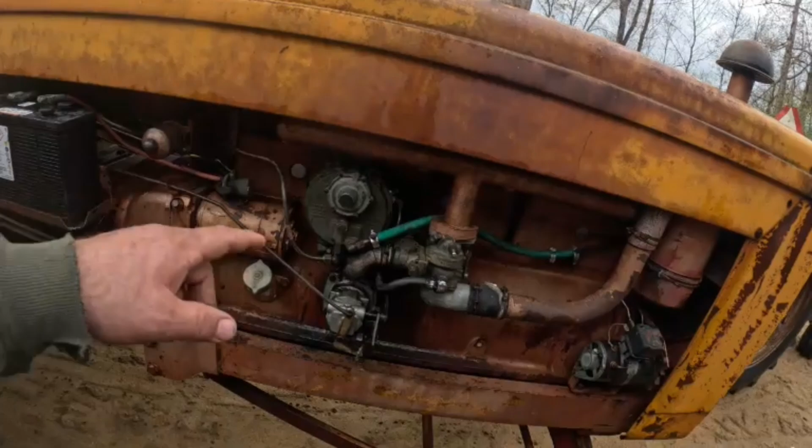And I want to change the starter solenoid. I'm still searching for that hose. If anybody's got a lead on a hose, I've called Welters, I've called Dean Zingray, I've called Philip there, Rusty Fence Row - he doesn't have one. He suggested make it out of copper, so that's one of the options. I called Clint Stom, I called a couple of my friends, I called Mike Tessman, he's looking too, I called Jay Grosskreutz, I called Mike Ehlers in Minnesota. I'm getting there. So if you know of one, don't just say, hey, check with these guys. I want to know they have one.

So I'd be interested in a good used one, just as long as it was good, of course. So this is the original wiring harness here, which, well, the coating's cracked there. I'm sure this is for the lights, but I don't know. We'll look at that too. It's not that I'm gonna be driving this tractor at night or anything, but I don't know what else.

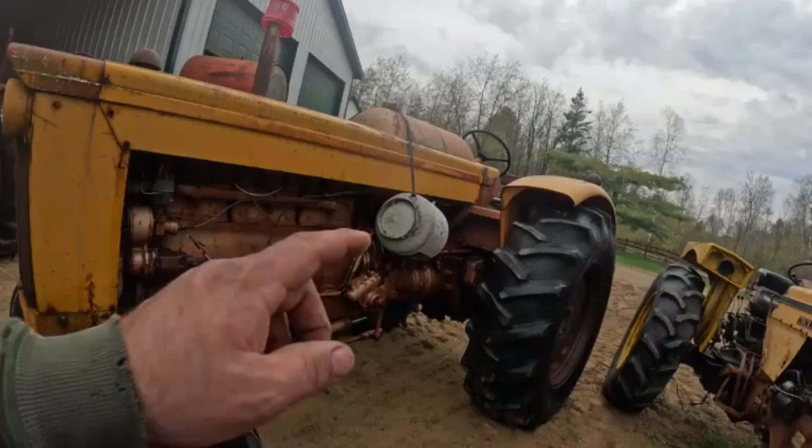Oh, the brake, I gotta figure out what's going on there. I don't know if you've watched the video or heard me say, before I went and picked this tractor up, this brake, or this wheel, was froze, which the brake was stuck. So the guy's son I got it from took the 4 bolts out of there, of the brake, to let it release. Well, then he couldn't get the holes lined up. So not awful, nothing hard to tackle, but missing a few bolts in the sheet metal.

That's not too much. We got to figure out my muffler situation, either order one or at least put a rain cap on it. I guess I need a filter. So I took out this housing here, and there's no filter in there. It's just like a paper filter. The original ones were more like cotton or something similar to that.

Yeah, you could have a belt pulley on these. You've seen even the 705s had that area for the belt pulley.

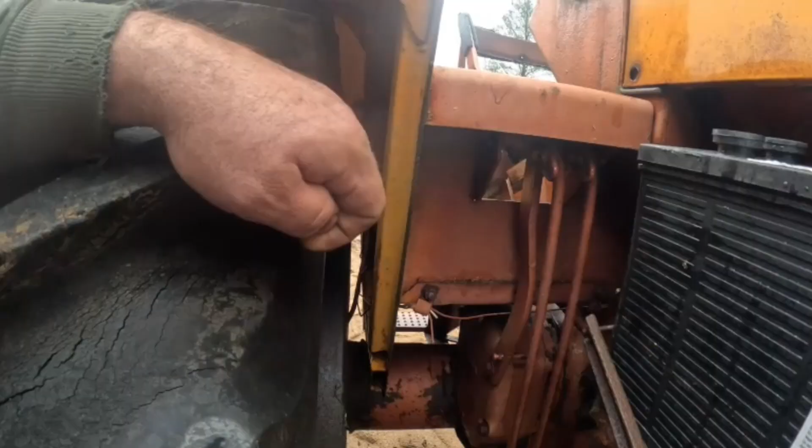Let's see, because that's the lever. I think the brake spring's missing too, because that should be - I'm thinking out loud, I guess. I was thinking those pedals had a brake spring on. They hook here, oh, they hook here and hook here. That's right. So I might have to order those too, just so that they spring back.

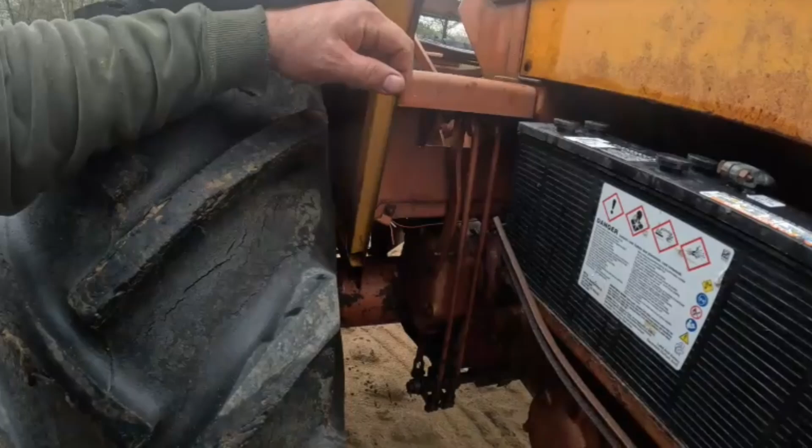That's right. Okay, boy, she's not awful dirty. Did have somebody comment about tractors lasting a lot longer when they're stored inside. Yeah, I agree, but I just don't have that option here. I could probably sell half my tractors and still not be able to build a building the very size needed.

So I do rotate them around, get some undercover for a while. I like in the wintertime to have all the diesels put away, as much as I can. But I've got a tractor sitting in my garage, I've got 2 tractors sitting in the old dog kennel. So I've got as much as I can stored inside, but it is what it is. I'm sure the guy didn't mean any negativity, too much at least. He was just making a point, and he's 100% correct.

So especially with these old tractors, any of them that have a distributor near the outside, it's not super protected. I think the IH's stick out even a little farther. Well, that one's got a cap on it, but anyways, moisture gets in there and wreaks havoc.

The hydraulic hose doesn't look very awesome either, but that one's easy to find. So I think what I'm gonna do is get this one fired up, get it inside, run to town, get new plugs, new wires. If he's got a cap there, I'll replace that cap too. I do have a 12-volt starter solenoid that I bought at one of the recent shows, so we'll replace this too, and go from there.

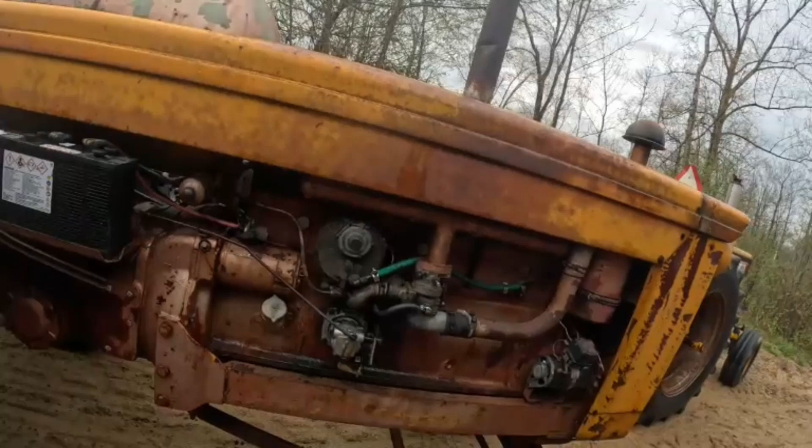So, what was I gonna do? Oh, I gotta turn the gas on and grab a screwdriver to start it for now. Okay, let's start her up. Hopefully she starts, she's been wet. I'll give her a little help. Helps when you turn the ignition switch on.

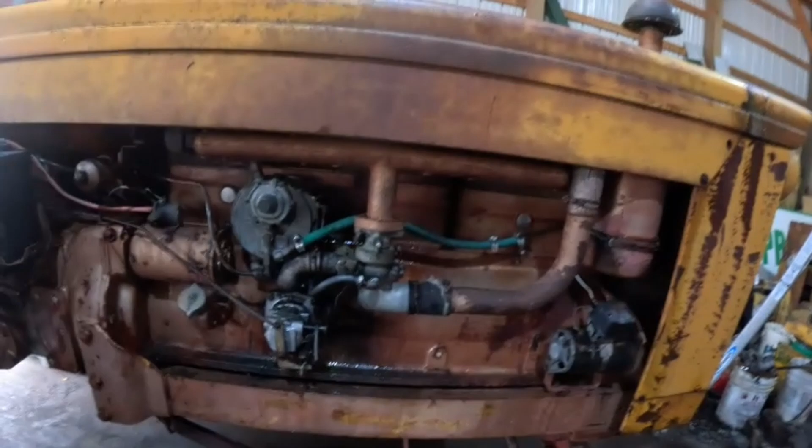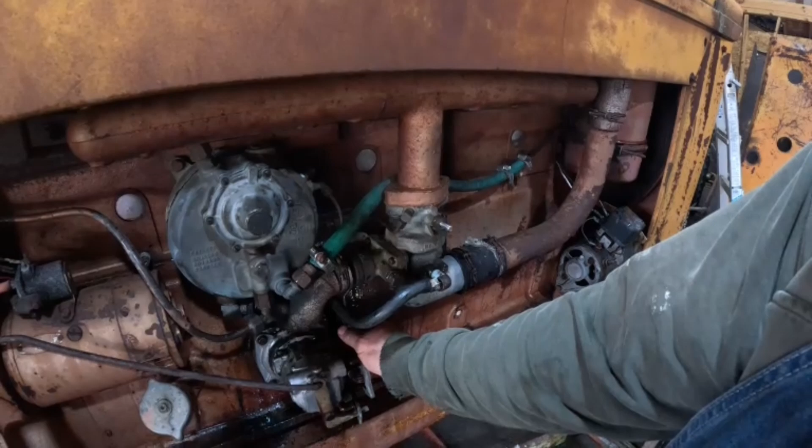We gotta fix that leak in the coolant too, don't we? Yeah, let's not forget about that. Okay, let's play a little bit here. She sounds good, that's for sure.

Okay, I think the book says this takes just... looking to see what's in there. The book says that's steam going off that leak. I think we'll take this hose right off for now. Yeah, let's hook it there for now. That'll be all right. I think it's D16, D19. Oh shoot, now I don't remember, but we'll take one out.

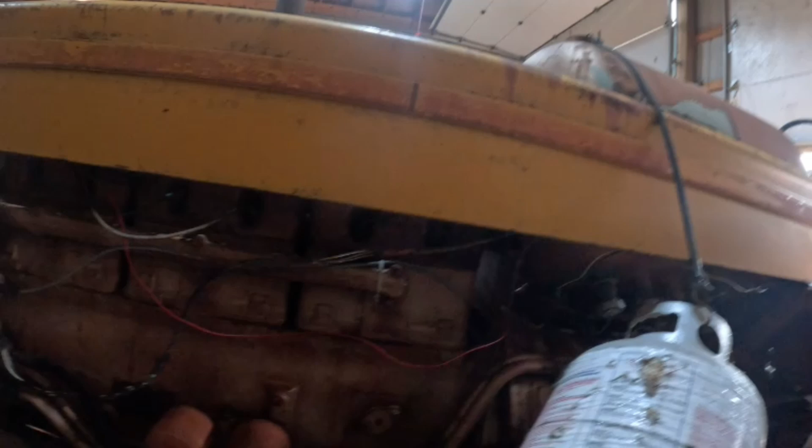I'm gonna go get six new plugs. We'll put new plug wires on it. We'll take the hood off, that'll be easier to get to all that too. But yeah, we're getting somewhere. I probably should get some filters for this thing too, do that while I'm in town as well.

So while I'm around town, I don't know if I'll be able to work on it. I got a softball game to go to around noon today, so that'll be so much fun. I'll do that, then this afternoon we'll get back to working on this. So see you in a bit.

Okay, we're back from the softball game. It was fun had by all, of course, but got home and Nicholas, I had some other stuff I wanted to do, and Nicholas got the lawnmower out, got it started all by himself for the first time of the year. What'd you have to do to figure out how to get it started? Put a battery charger on it, put gas in it. Oh, yeah, I guess. So that's good, it wasn't that difficult, but he got it done.

All right, you got that impact? All right, we're gonna take the hood off, grab the air breather top thing off, if you don't mind. Like I said earlier, this is missing a few bolts, so this shouldn't take too long to get off.

Oh yeah, half-inch wrench. Top. It's different from a few days ago, now it's muggy out. There's a half-inch box in there, yeah, on top of it. Right there, down, right there in front of you.

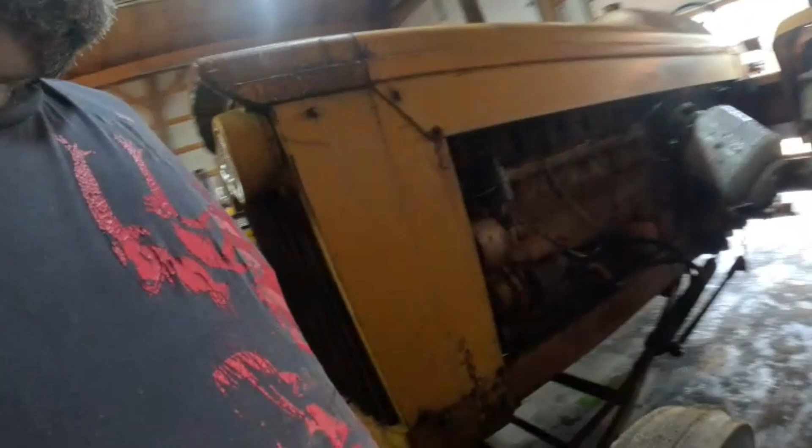Please put that all back together. It stays together, all right, that's all right. That's for this side, all right. Okay.

Got new spark plugs for this, new wires. The cap will be in on Monday, and they did have one oil filter but did not have both of them, so we'll wait for that too.

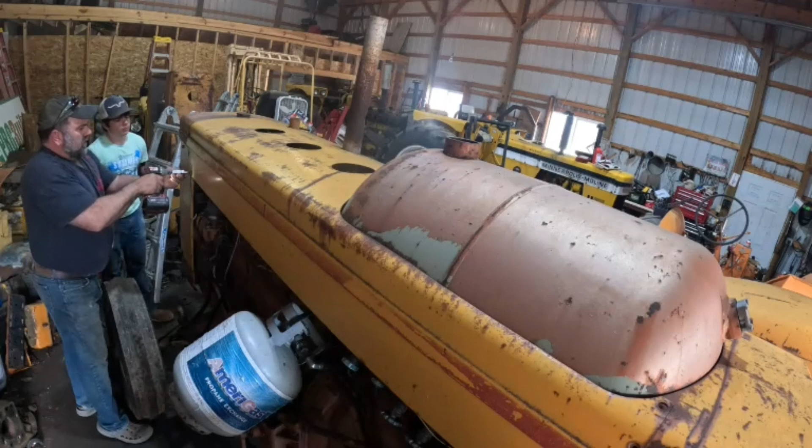What do you think, you don't know? Okay, you don't want to get on the other side? Well, yeah, where are you going? Okay, we'll get on the other side. Tell me, you listening? Yeah. We got to lift up over top of the tank, then we got to get over top of the pipe. Okay, you going to be able to reach that high? Probably not. Okay, all right. Ready? Yeah. Hold on, somebody forgot a bolt here. It was matching the rust, blended right in. Okay, might be ready now.

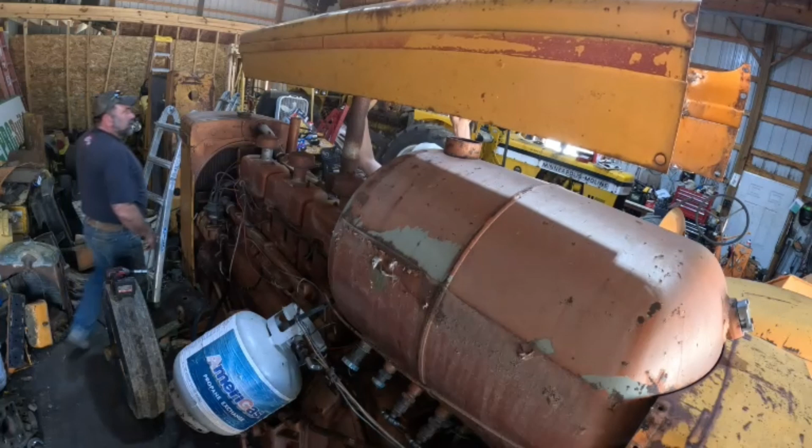Hold on, hey, you got to put that in the... that's why I said hold on. Alright, coming your way. Just balance it on there. I'll come over there and I'll grab it, okay? Okay. Get on the other end. Ready? Okay, put your end down. Okay.

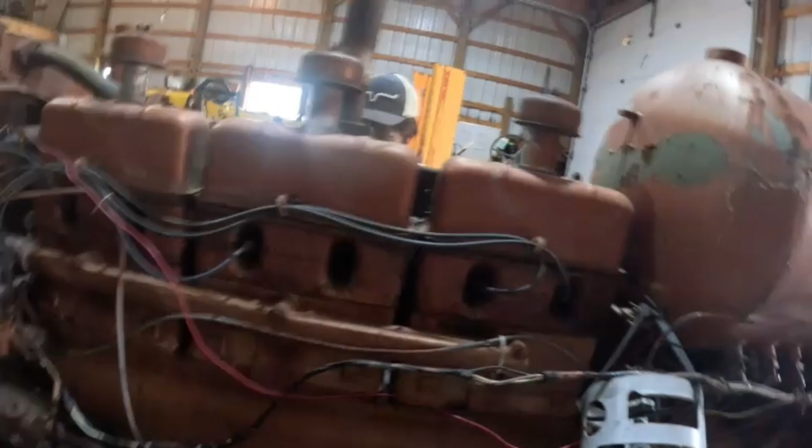Now we can see a little better. That's for sure. I was looking at these heads - these are 4207 heads, a fairly high compression LP head.

All right, I want to see where this thing was leaking. Let's see, it's leaking back right here. You can see where it's wet there. I don't know if it's that hose or a gasket. That hose doesn't look awesome either, does it? That's a coolant hose.

That's the coolant inlet, and it goes through everything here. The vaporizer, mixer, vaporizer, whatever I call it, comes out here and goes that way.

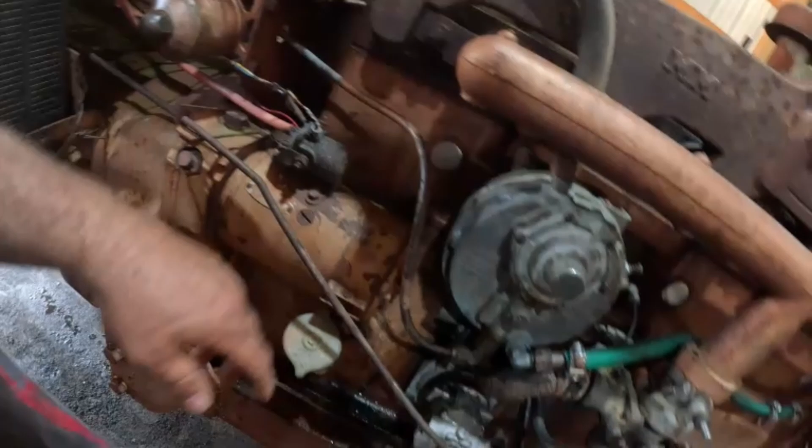Let me find a bucket or something to stand on here. Flashlight works. A light, you know, not that red one because that's dead - I need to charge that up. This one probably sucks. Yeah, that's why I asked for one that works. I'm just curious.

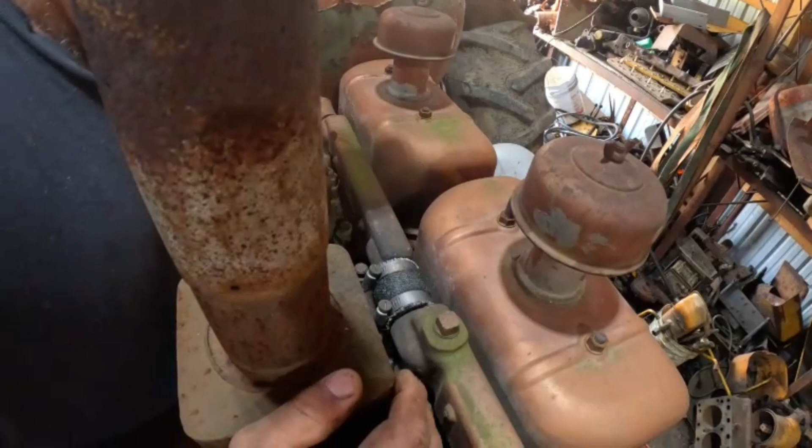I think, I hope. I'm really hoping I don't have to take the exhaust manifold off to get to it, but we'll see.

Regardless, I think I'm gonna have to take either this here - hang on, I don't know where to tell you to put it. Oh, you know what, that'll work in the dash of any of these tractors. Just set it on top of there for now, I guess. We'll have to take off either this one or this water manifold.

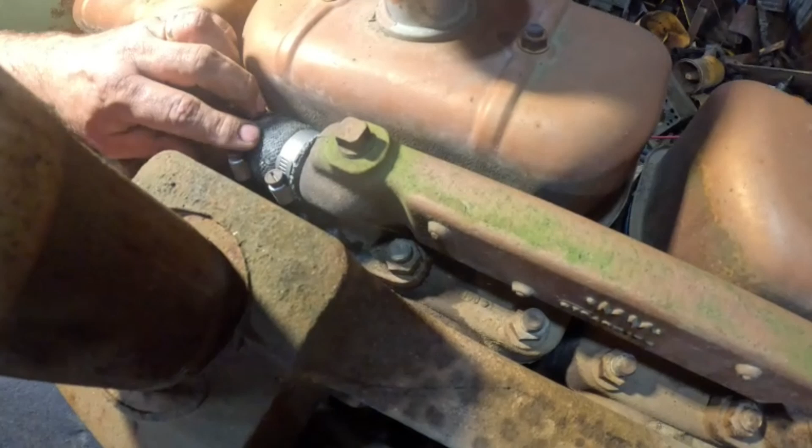This hose looks like it's fixed, or fairly new, I guess. We could either start it up or put more water in it, and then see for sure where it's leaking out. Yeah, we could do that.

You want to grab one of them gallon jugs that's over here in the trash? Just go put water in it, please. Then we can do that.

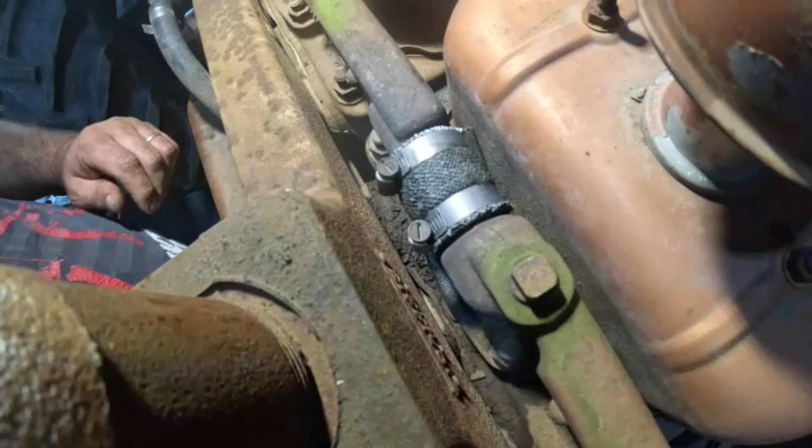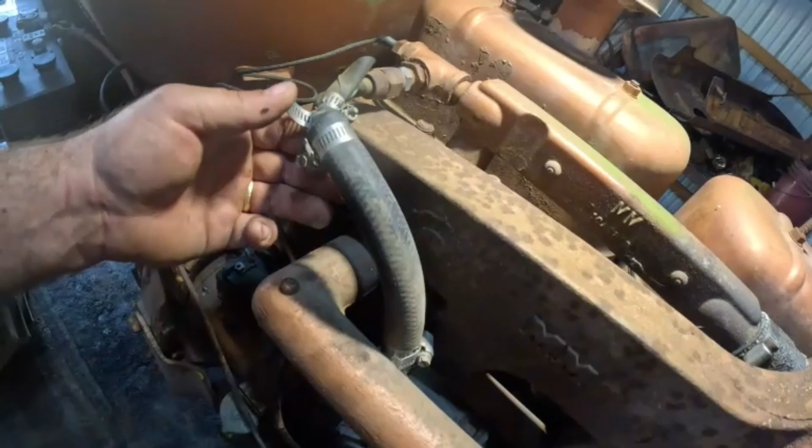All right, yeah, that's definitely a farmer fix. Either you can see their gasket - they put a piece of inner tube over top of the copper, squeeze that down over top of the rubber. But yeah, we might do something different with that. Got to unhook it anyways to get to that there.

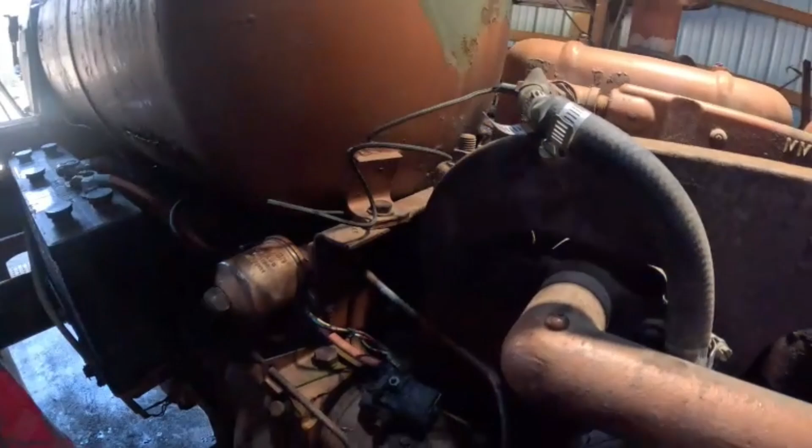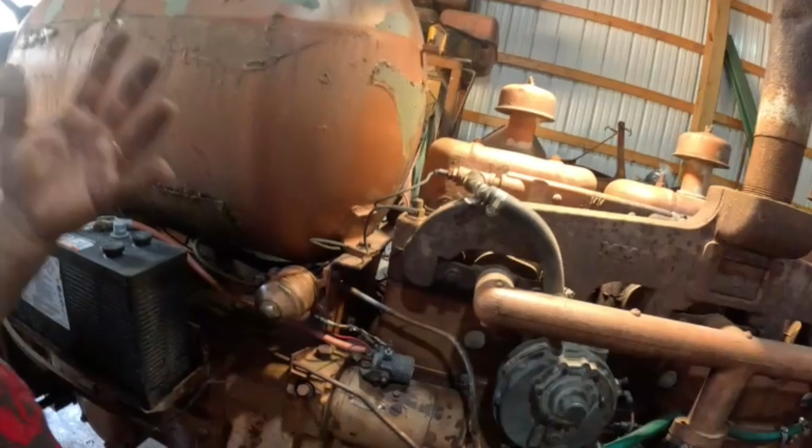I'm just checking things out here. This is that bronze metallic paint that's underneath here. There was Dyna Brown, then the bronze metallic, and you'll see some of the Jet Stars that were bronze metallic too.

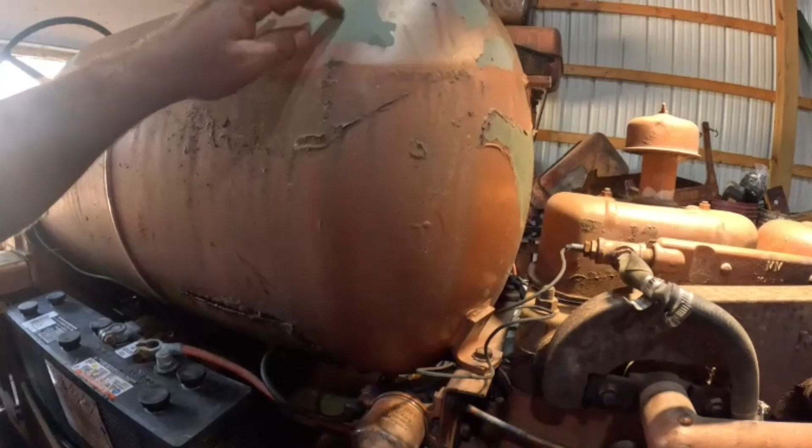I don't know for sure why they, I don't want to say goofed around, but switched around. They painted some of the tractors brown belly with the Dyna Brown, where this one's actually that bronze metallic - it's got a little metallic sheen to it. I don't know if it's showing up on the camera, but even this intake manifold here is painted that way. But then some were the Dyna Brown. So this all looks like what I would assume is original paint. I would assume that's like a grayish greenish primer underneath that tank, but that could have been the tank manufacturer, not so much Minneapolis Moline when it painted that too. But I don't know, it's just kind of neat.

This is definitely one that could be repainted and look fairly nice. It wouldn't need a whole lot of extra body work. Yeah, you'd have to sandblast a few things, but that wouldn't be too bad.

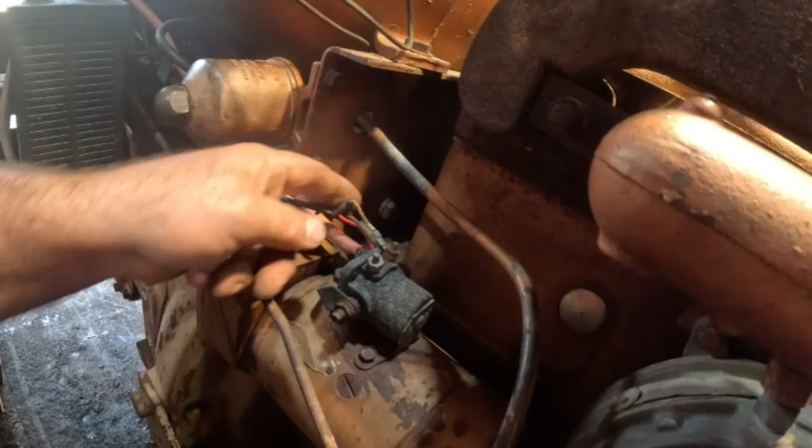So I think, yeah, the battery's already unhooked. I think we'll switch this baby out, get that done. If that's just the tape that's getting kind of yucky, or what here? That wire there looks like it wouldn't hurt to replace that too.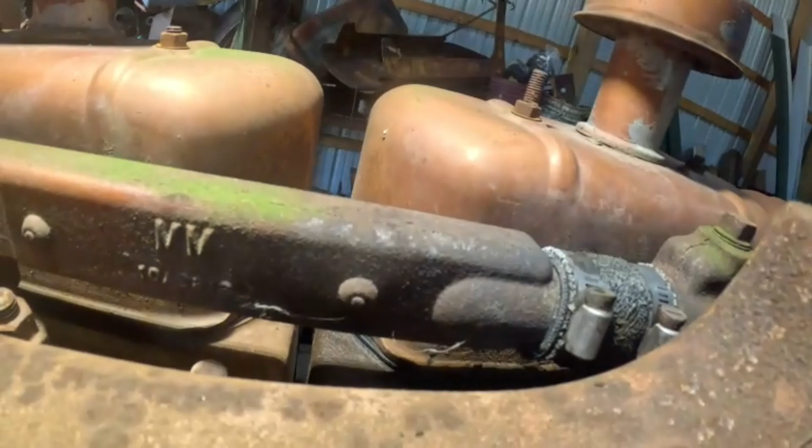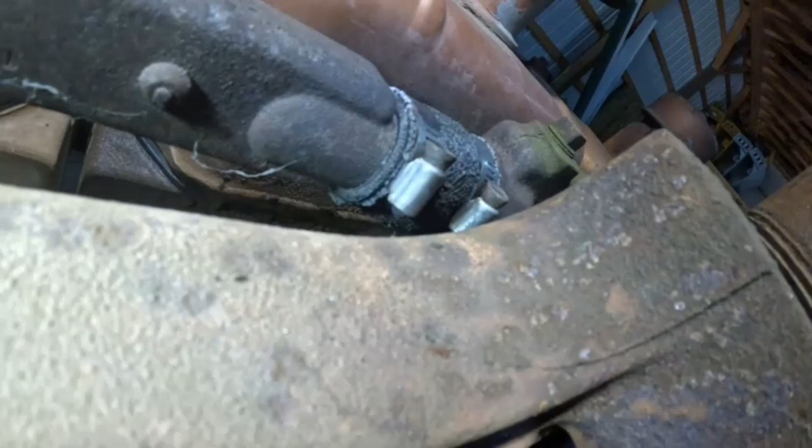Go ahead and put it in the radiator. All right, let's see if we can - what did I do with that other light? See if we can make it leak, because it's leaking, I can see it up higher on the... where it goes, is it? Go ahead and put a little bit in. Try not to spill it all over, because then that affects our looking.

You're spilling more than you're putting in, I think. Or is it full? It's full. All right, another thing we could do, we could pop that plug right there too and put a little water in there. I was trying to see where it's leaking.

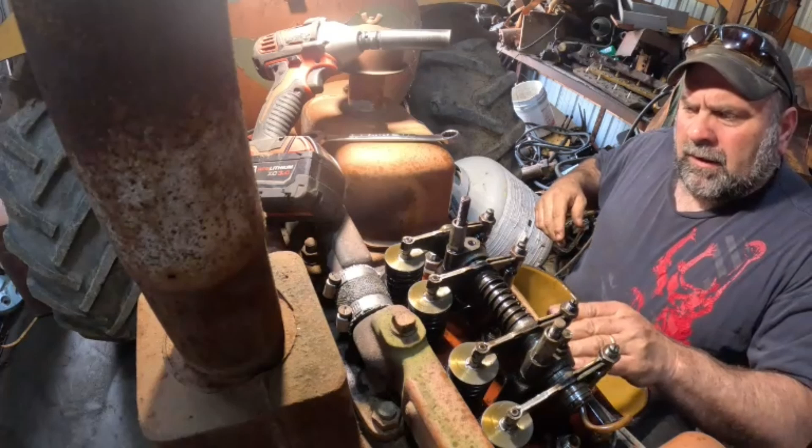Okay, fairly clean on this side, that's for sure. I'm gonna grab my flashlight thing here. It's wet on top - I don't know if you can see or not, but it's wet on top of that bolt. So that really tells me that it's the hose that's leaking.

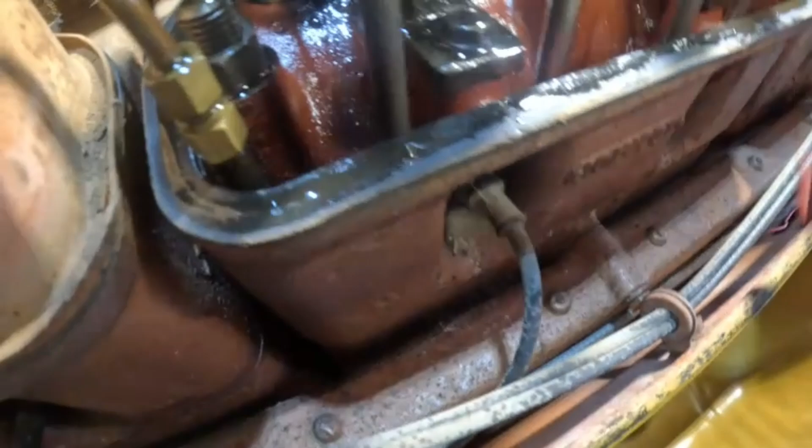Man, you think that would be running right? Oh yeah, you can see right in the middle of it, it's quite wet. Did you find it, bud? No, I don't know what to do. Well, what I got him looking for, and I thought I knew where it was - here, I'll show you.

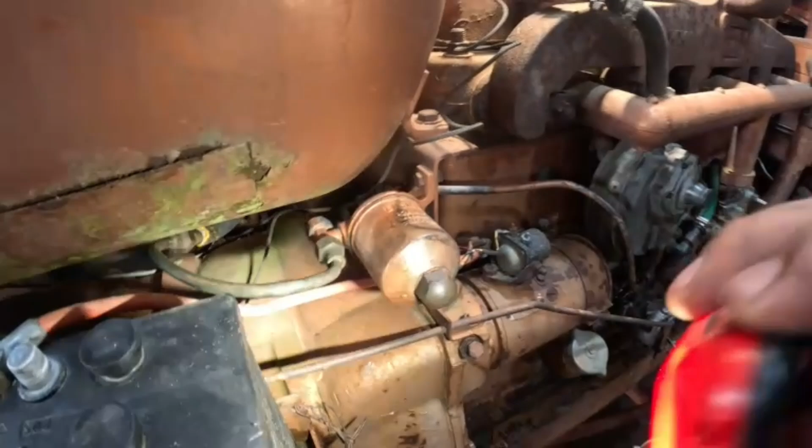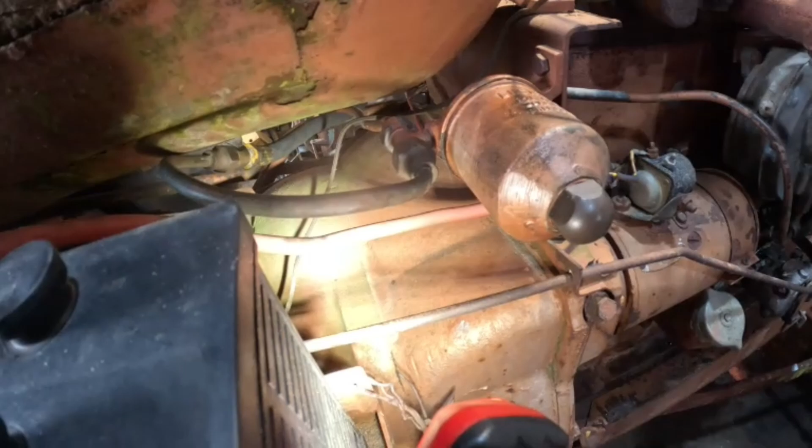When I put my barbecue tank on there, there was a plug on here, and I had it in my pocket, and I had it in the house. I took it out of my pocket and put it where I put my change stuff, you know, like a guy always has a spot where he puts his wallet. I put it right there. Well, guess what, it's not there. I don't think my wife would move it, but you never know. So, yeah, I need that to put on there. I probably have another one out back on the parts tractor or somewhere else, but I really want the one we had on here.

I'm just looking in here in case I set it in here for some reason, but I didn't think I did. And it's brass, so it's not magnetic. Wait, is brass magnetic? Jeez, now I'm second guessing myself on that too.

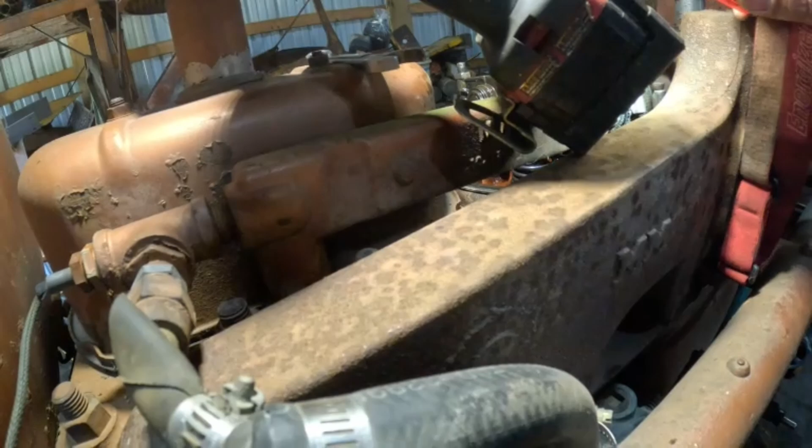Okay, well, we figured it out. Ooh, turn that light back on. It's my hose. That's such a short hose that, what a pain that's gonna be to get out. Actually, yeah, it's gotta... okay, well, we'll fix it. So, alright, got that figured out.

Let's change this starter solenoid, I guess, real quick. More light on the subject. Okay, battery's unhooked. I need a 7/16 and a 1/2 inch. Yep, please.

I got the 1/2. Maybe I don't need the 7/16. Just give me either my ignition set or a little 5/16 doodad guy there. Oh, I still gotta have 7/16 still for that one right down there. Always something. Yeah, okay, okay.

Boy, she's muggy out today. I shouldn't complain. You know, wasn't too long ago we were seeing our breath while we were working.

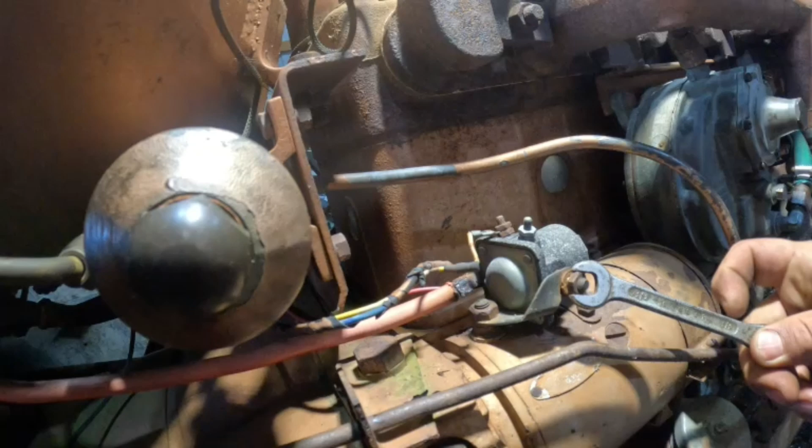This is all rusty and crusty. So, okay. Well, we're gonna have to drain some of the antifreeze out now to get down below the top of the motor. That washer doesn't look all that good anyways. Alright.

Do you have the time to listen to me whine? Nope.

Okay, hey, sorry I keep bumping it. Might need to use like a 1/4 inch ratchet with a deep well 7/16, maybe. That would make me happier. I don't know if it will or not.

Well, Jake should be home on Tuesday, finished with college for the year.

See if I can get in here with this. Yeah. Oh, where's my stubby wrenches? Okay. Alright, this is working. I still need to find that wrench though. Figure out what we did with it there.

Well, this hose up here is currently not leaking, but if I gotta take out part of that manifold there, that'd be the time to fix it, I guess.

Okay, yeah. Did you find me my ignition set? It's in that little red case, should be in the specialty drawer. Nope, that's not the specialty drawer. Top drawer, left, up, red case. No, it's on top, right in front of your face. Yep, right there.

Okay, give me the 5/16 out of it. I think that's what that is. Pretty please.

Oh, size bigger, it's my fault. 3/8, 7/16, you went size smaller. I need size bigger.

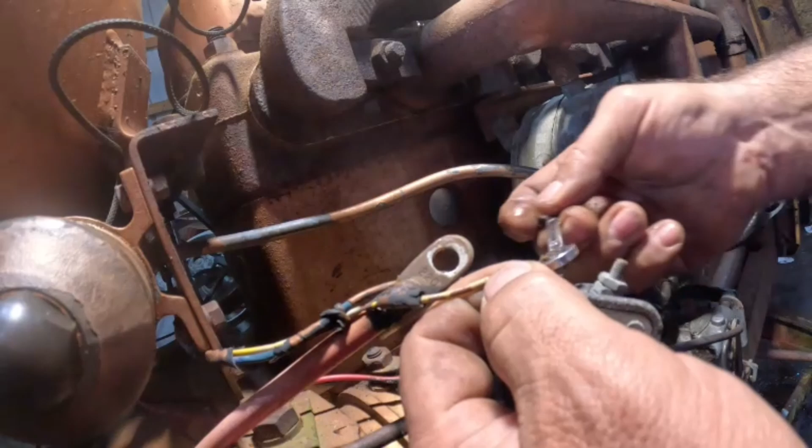Always something. You keep -- if you're looking for stuff, it's not hard to find it on these old tractors, especially ones that have sat for any time. This one, and I know it sat for 2 years. I don't know if it's sat any longer than that or not. But, alright.

You really don't need a 2-prong deal on here, solenoid. Alright. Again, it was right where I put it. Okay, yeah, this was $29.

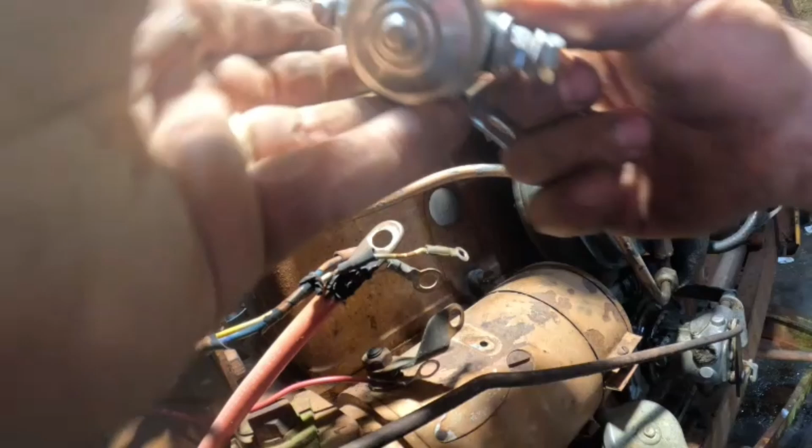Well, I think I got this at the show, to be honest with you, when I was out in Minnesota. Alright. Ooh, okay, I'm just gonna set that there for now.

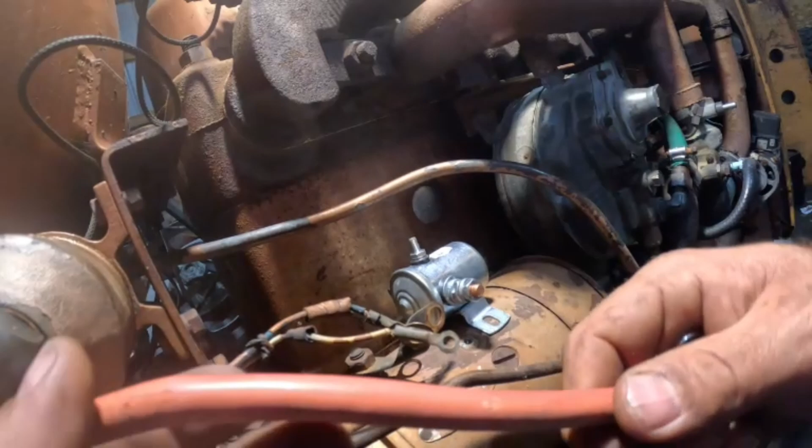I don't know if I should put a new end on here, because, well, this end's pretty good, and I could shorten it up just a hair. You see my box of goodies over there? Another one of these ends.

Okay, that wire, that looks alright, this one. That won't look too bad. Same, it'll work, yep, that'll work. Okay, just put it over there by the vise. I know, please and thank you. Okay.

Where's this wire go? Alright, yellow wire, alright, yellow or white? What is it? Okay. Got a little twisted tie thing here. Is that tape? What is that? You gave me that little pair of pliers. Okay. Is that tape or is that wire? Oh, I don't know what that is. Okay.

Yeah, it's got a couple breaks in it. That's no good, especially if we got any LP leaks. All right.

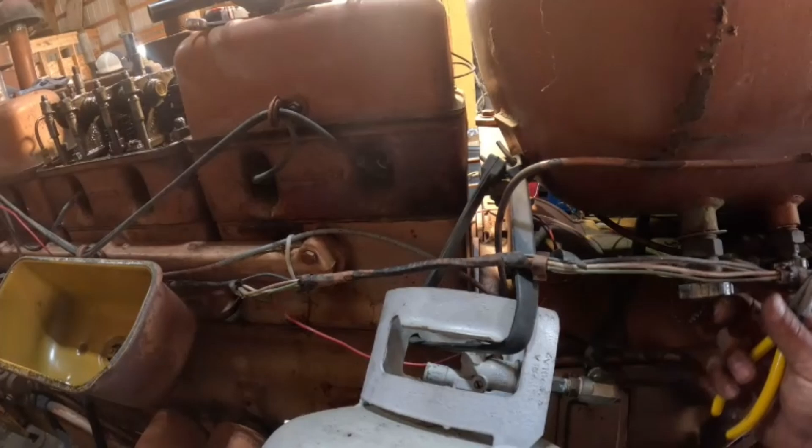Let's go to the other side and see if we can figure out where that goes. So it's right here, right here. Okay, it's this one here.

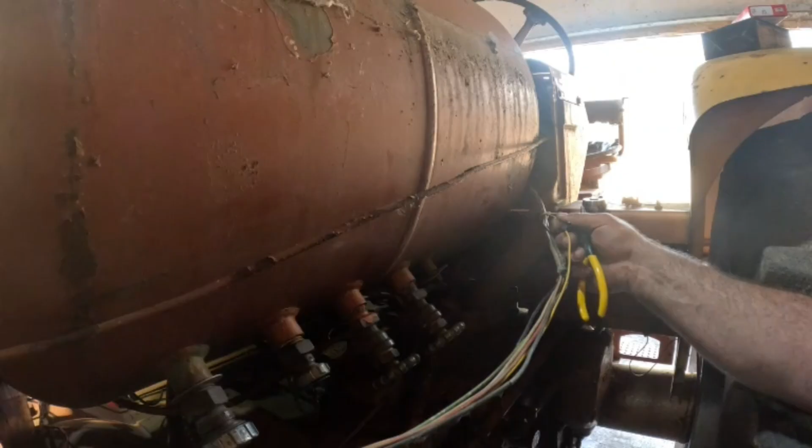We got a splice here. Got a splice, I think it's a splice here. There's tape on here.

Let's do some investigating. Is it a splice or is it a nick? Oh yeah, it's a former splice. Or no, okay. Well, I think what we'll do, we'll cut it off there and run new from there.

So, okay, I need a heat shrink butt connector. Okay, I'll get that wire ran and come back.

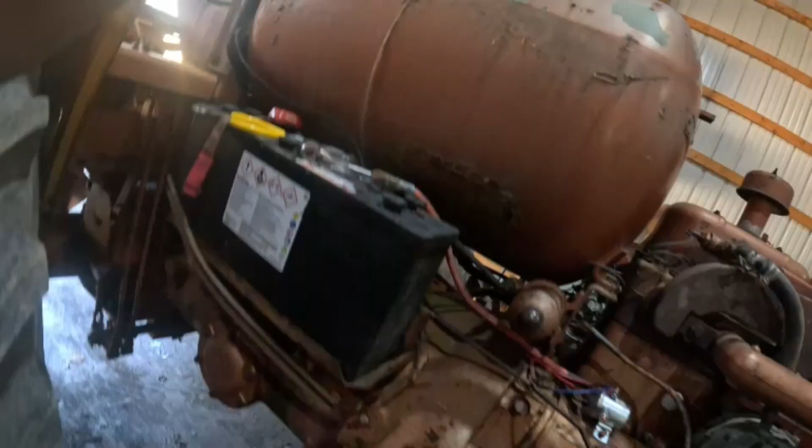Okay, starter solenoid. Did you take that light down? Yeah. Oh, I wanted that left up there so we can see. Anyways, change, not the starter. Yeah, the starter solenoid. Got that wire hooked up.

All right, let's see if she'll turn over. I don't have the gas on, so she won't start, but turn the key on, one click, push the button, just see if it turns over.

Stop. Okay, that's what we needed. That's good enough to test. Turn the key off. All right, now we'll unhook the power again and keep working.

All right, well, that's a little bit of progress. We got that issue there taken care of. Still haven't found the hose yet. Talked to another buddy in Texas who possibly has a lead on, maybe a used one. So we'll see, this is getting a little bit difficult to find.

So, okay, the other thing. Oh, spark plugs and wires. So yep, I went and bought a new set of wires.

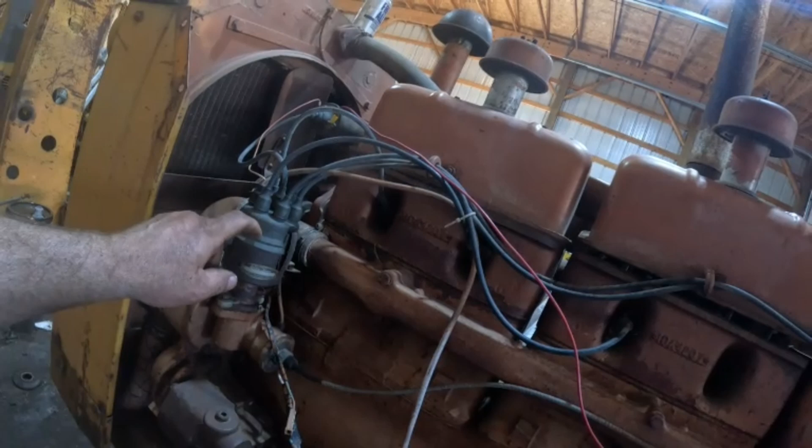You got that light so I can shine it on all this stuff, please. So I had to order a new cap. I got a new cap coming. So today we'll just reuse this one for now.

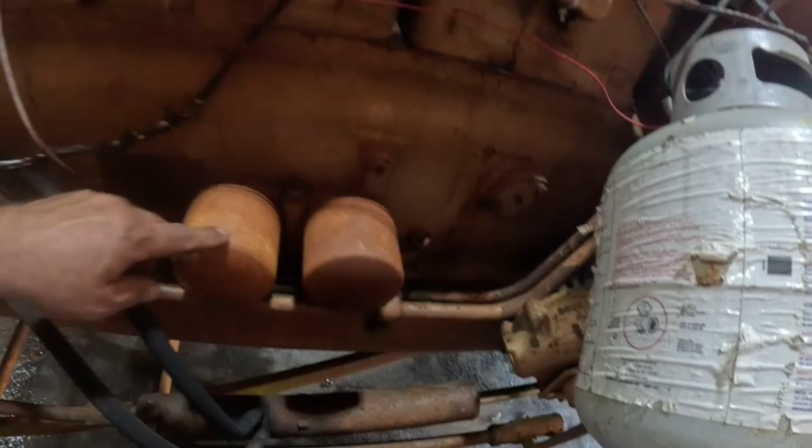And like I said, I got new oil filters coming. They had one in stock but not two. So we'll be doing that early next week. We'll be changing these, and well, of course, the oil.

Well, you've seen me make new spark plug wires quite a few times, but I will just stick that one in that hole for now. All right, where's that spark plug wire set?

Give me the spec for the gap for those, will you? Okay, I normally make my own spark plug wires. These are copper core wires here. I do believe if you put an electronic ignition on, of course you got to have the proper coil, but you also have to have, I believe, the graphite wired ones for spark plug wires.

So all right, bring that over here, bud. I'll help you find it. Okay, this book has been out here too much. So first of all, you're in the letter series. I shouldn't say letter series because this is technically probably a letter series, but we got to get to the GVI or G6. Huh, all right, look here.

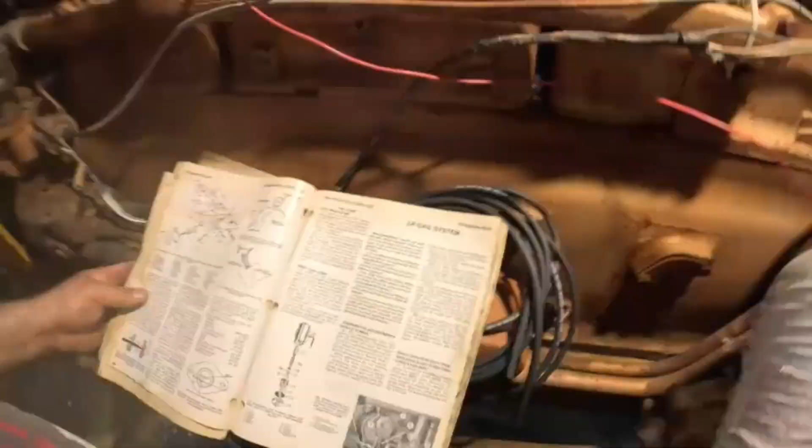So this is in my I&T manual. But anyways, there's a picture of a G6 or Massey Ferguson 95, same thing. LP, the Ensign LP gas regulator. On here, that's got mostly pipe coming out of the carb, going down. The only place there's a rubber hose is connecting the two right there.

So I don't know how well you're gonna see that. So that might be what we're gonna do, because that could be just a 1.5-inch hose or whatever I come up with. So, but I could just get that out of regular galvanized pipe there. That might be what we're gonna do.

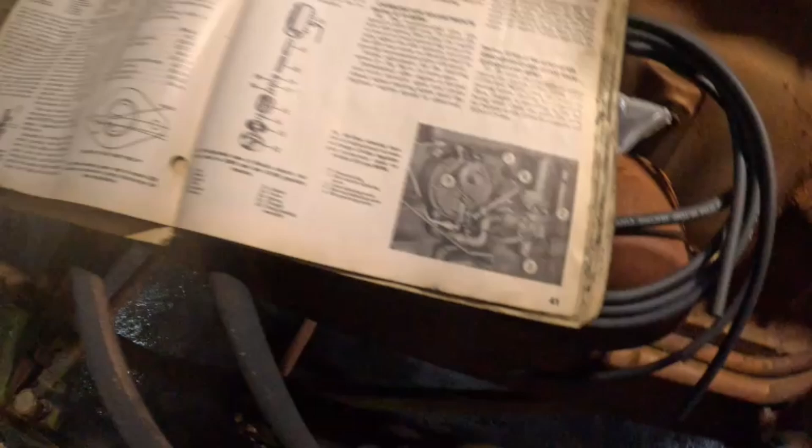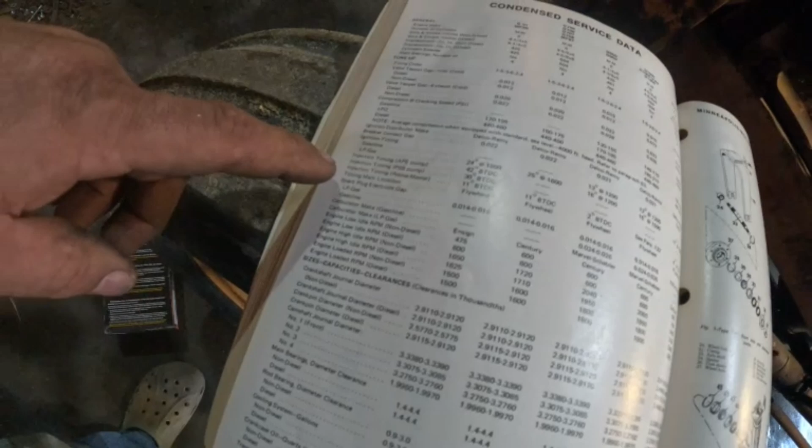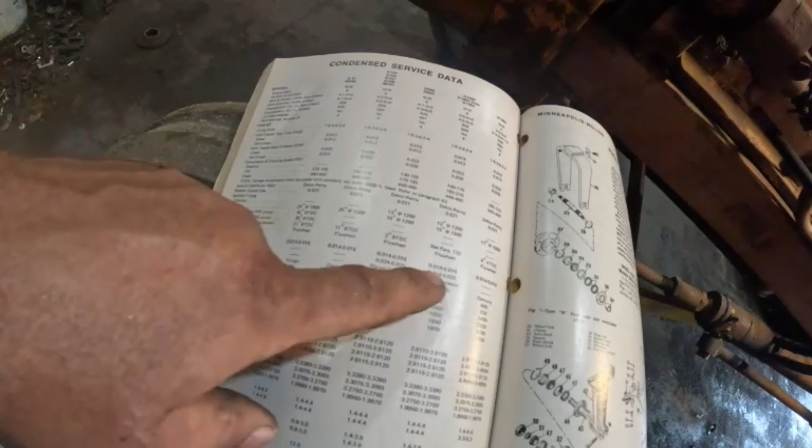See, it pays to have a manual here. All right. Okay, it's on my book here and the information, G6. Oh, right here, spark plug electrode gap, LP gas, 0.014 to 0.016. So it looks like that works for all models in this category here for the LP gas.

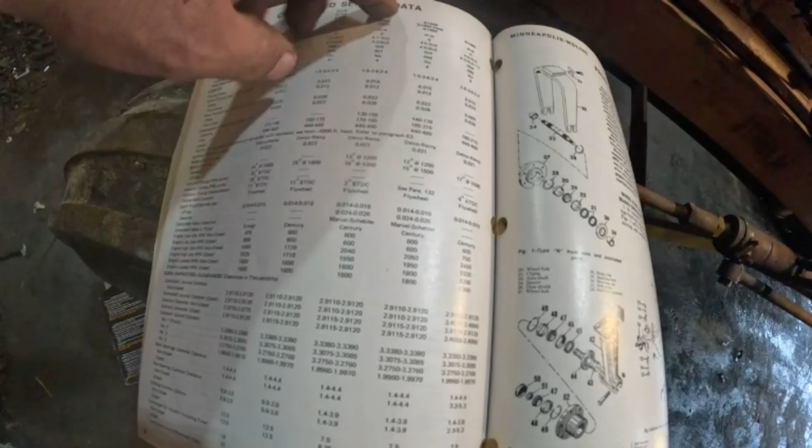I guess I didn't realize it was tighter on the LP gas than it is on gasoline, which, yeah, they did make a G1000 gasoline and a G900 gasoline. I guess there was some conversions probably of some 50 series, or there was a gasoline Vista made at a dealer, at least one.

That wouldn't be all that difficult to do. I mean, you'd need a diesel tank. Well, I guess to make it look right, a diesel tank maybe. Then of course you wouldn't need all the LP gas stuff. You just put a normal carburetor on there.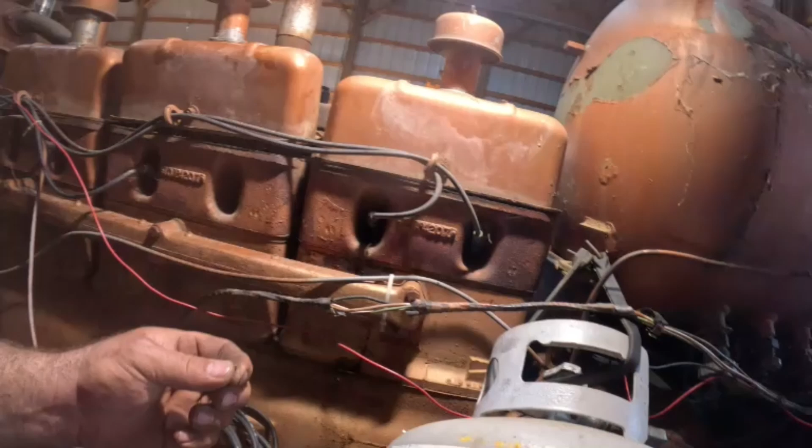So all right, well, I'm gonna change all these spark plugs out real quick, then we'll make some new wires. This had Champion D9s in it, so that's kind of a different spark plug. That's what the book actually calls for, is D9s. I don't really prefer Champion spark plugs, but if you like something over another, yeah, you just go with that route.

I'm gonna put all new plugs in it, then we'll make new wires, and then maybe we'll start it back up and see if I can see where that water is leaking. When we get all that stuff done, if I have to disturb anything, I'll change the oil after that, just in case something got down into it. We'll drain it out and get it out of the system. Just my two cents and thoughts. So that's what I'm gonna do.

I'm gonna change these plugs out real quick, get them all gapped to the correct gap, of course. I'll just set that on there for now, and then we'll go from there.

Okay, all the plugs are in, just about ready to put wires in, but I wanted to show you the plugs real quick. I probably didn't need to change them. All the plugs were dry, and none of the electrodes look burnt. I could probably keep these for spares, or the kids can use them for sinkers fishing, I don't care. We'll just set these over here for now. I only had 5 in my hand because the other one's over on the toolbox, but I did put 6 new ones in, and like I said, I probably really didn't need to, but I did. So it is what it is.

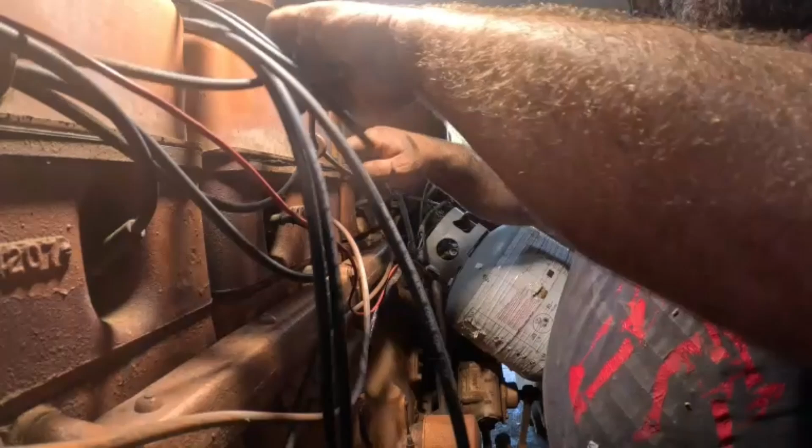I'm gonna set you right here on the old hydraulic pump and go from there. We'll put these wires in, and I'm probably gonna have to cut the video right there. All right, let's start with the longest one, number 6. That's not really a good spot for you, I want you to see everything I'm doing here. If I set you on the tank, are you gonna be able to see? I don't know either. Okay.

Try to run them back in just the way they are. Let's cut this end back off, I guess, that way I can fish it through. Although, thinking about another use someday for it.

I'll be back. Okay, battery changed. All right.

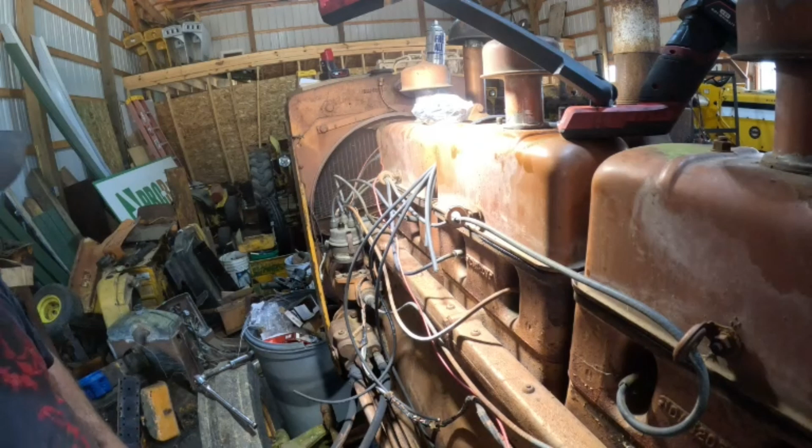I'll just set them down there in a pile for now. There's two of them here, they're the longest. We'll just take one of them. Actually, I'll grab them both right now, maybe these two, we'll use them first. All right, set one there. I'll run it back through the looms, or holders, whatever you want to call it, holders I guess would be the right word, before we cut it for the end.

Yeah, I think we're gonna be long enough, but not by much. All right, hook that end up. Okay. Oh boy. Houston, we have a problem, that one's too short. So I think what I'm gonna do is run it on the outside of that, run it direct over, we'll have to zip tie it up for now. That's barely long enough there. Okay, all right, well.

It's not ideal, but I want to get this thing started again today, so.

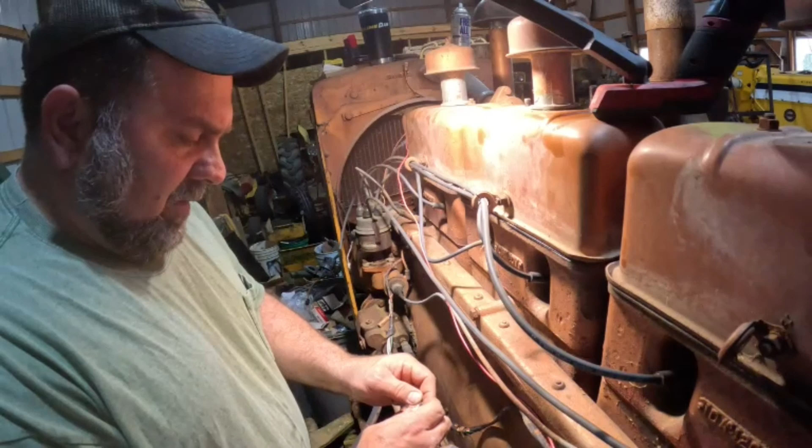Okay, well I'm back, this is actually the next day. We had to take off, had to go to, Lydia was in a talent contest at church on Saturday evening, and it was different, that's for sure. There was a variety of acts and stuff there, so she did well. I was proud of her, or am proud of her, you know what I mean.

So I didn't get to finish this last night, and I don't know if you can hear it in the video, but it's raining pretty good here again in Michigan. Dry is not what you would describe our area. But it is what it is, so, okay.

So my plan to finish out this video is to get these spark plugs back on. Then I should be able to try to start it. I want to investigate that leak, and we'll go from there, get that figured out. I'll get the O-rings through AGCO, but I think I already have them. I had to buy a bag of 10 when I was working on that 1050, and I think there's only 3 on that, which, 1, 2, yeah, there's 3 on here. So 6 cylinders.

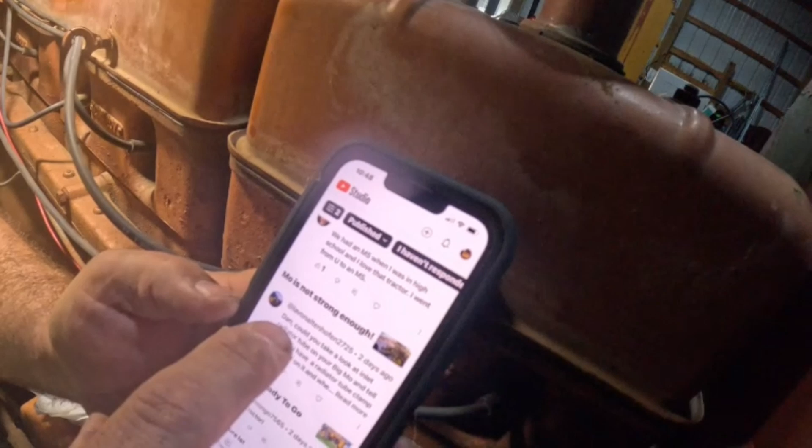But here, before I forget, somebody commented, I screenshotted the picture or the question. Oh, I thought I did. Well, I can get back to it at least. Comment, question, and sorry if I screw up your name. Because it says, or maybe I can bring you right in here, from Levon Altenhofen. I don't know where, I'm guessing you're from the other side of the pond, but just guessing.

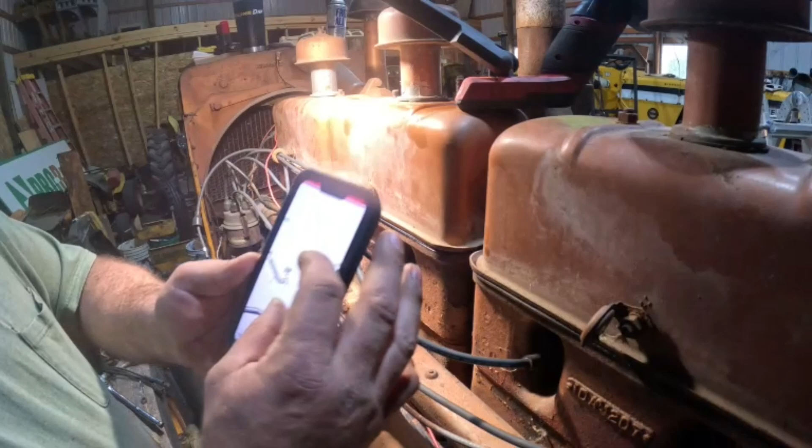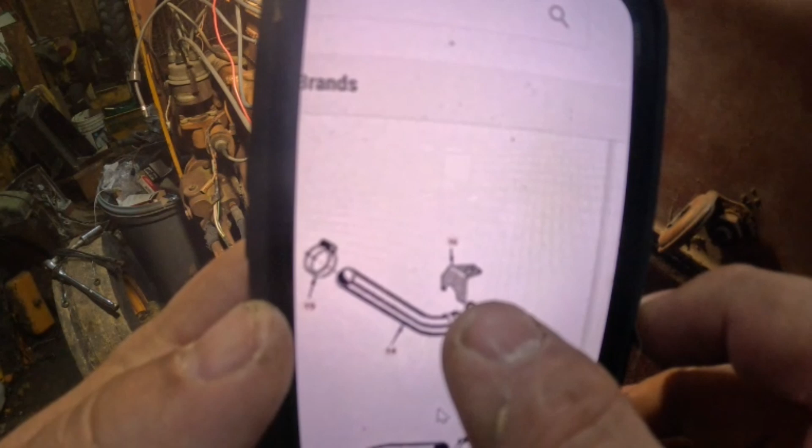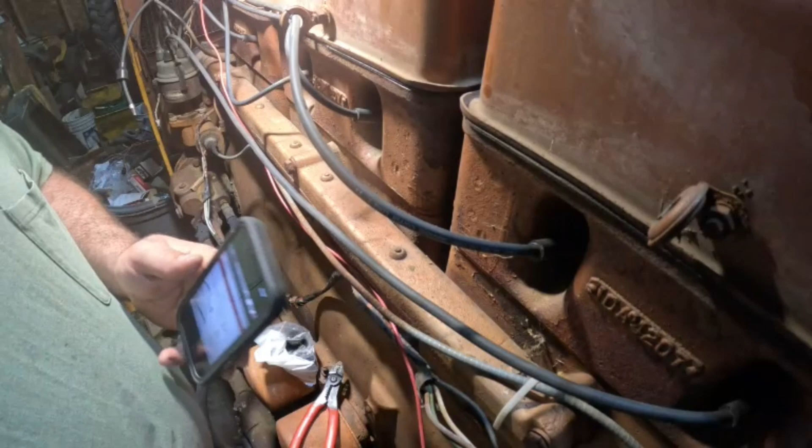But anyways, he's talking about on the Big Mo, the water inlet, where it comes out the top of the block and goes into the top of the radiator. From the factory, there was a clamp on there, and I did take a picture of that. Let me try to get you in close. He's talking about that thing above my fingernail there, and it clips onto that little pipe. There's no ring behind there, and I don't know if it's on top of the valve cover or whatever. Mine does not have that either. I've seen several times that they're just stuck in there. It is a pretty tight fit, and you put some sealer around there and it's probably all right. It's really not a lot of pressure, it's not a high pressure system, so you're probably all right anyways.

So hopefully that answers his question. Let me think here, what else was there? Oh, I don't need that picture, I don't think I do. Get back to that. But oh, I had somebody, Brian Forson, was asking, why did you get a Ford?

Well, I've had one of every, GM, Chrysler, Ford, and I've had the best luck with the Fords. I kind of grew up on Fords, even though my dad doesn't have one anymore. And maybe you typed up this question before you got through the whole video, but I used to own that truck, that white truck that Nicholas is driving. I think that's the truck you're talking about. I know the history on that truck, very comfortable. I know where it went and what that guy, how he took care of things after it left me. So that's why. And it actually was a pretty decent price too. I don't want to say I could afford it, but we made it work. Anyways, so we got that done, that's why we got a Ford.

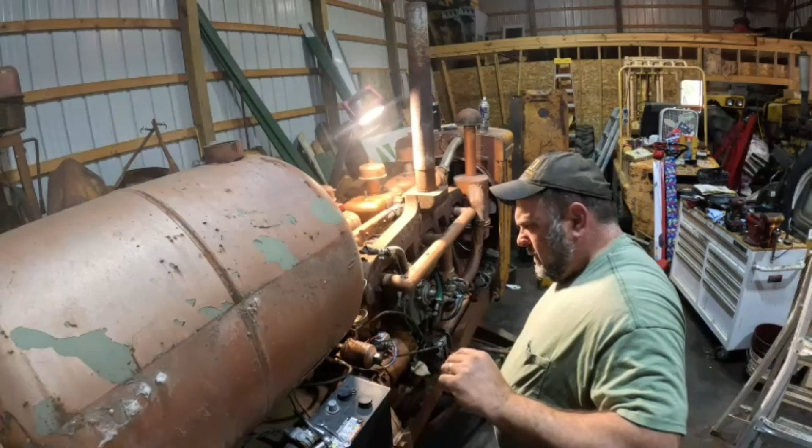Oh, I gotta clean this off again. All right, I need to move this somewhere else. All right, turn the key on. All right, I'm gonna set you up here for a minute. Now I can use the push button, I don't have to cross the whatcha-dinger thing. Oh, I gotta hook the battery up though if you want it to work. Minor major detail. So, okay.

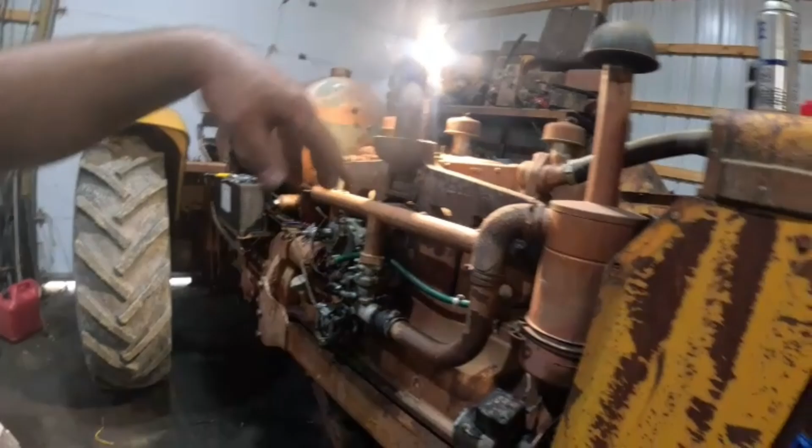All right, well, we gotta run to town, run some errands with my wife, and then that'll be enough for this video. But when I get back, I'm gonna continue to work on this. That'll be the next video. But we're gonna fix that coolant leak. Hopefully I've got some hose around here to take care of that. Then we'll get that back together. Then we'll start draining the oil, just doing the maintenance on here, and we'll end up, I'm gonna put a PTO in this tractor.

So that might be something you haven't seen before. It's not as difficult as some might think. I'll tell you this now, but I'll tell it again - it's the same PTO unit that is in this Z, that's right here. Any of the U's or G's, even the 705, it all takes the same unit in there. You just got to have that shaft, you got to have the PTO unit, and there's a shaft in front of it, a little coupler thing in there too, and it should all fit right in there.

And then you know, that plate, you can - what I'm probably going to do, I got a part Z out back, that's all it is, a rear end that has the PTO unit on there. I'm going to take that off, we'll put it on this. What I'll probably do is I'll put that delete plate that's on this tractor on it. But those are kind of a collector's item, because they've got MM on them. You paint them up and people hang them on a wall. So you can do that too.

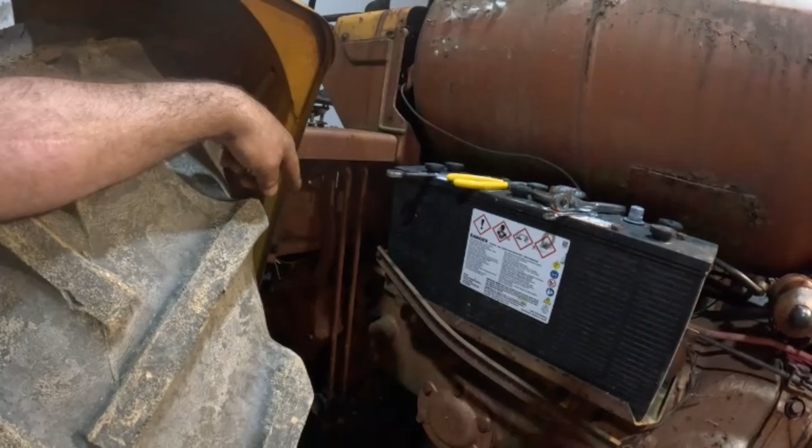But I'm going to do it so I can keep the critters and as much moisture as they can out of that rear end, because somebody might want to use it someday, or hell, well, I'm taking parts off it now. So I did look up, I can get new brake return springs, if that's what you want to call them, for here through Agco. They're like $20 a piece, but they're quite a long spring. So I might call Welter's or other sources and see if they're a little bit cheaper out there.

But yeah, this tractor, I liked it. I revved it up, it didn't have that miss. So, if I had to guess, by looking at spark plugs, I don't think it was a spark plug that was the issue, I think maybe one of the wires was an issue. So, because I didn't adjust the timing or anything, but when I had her at high idle, it was running smooth, real smooth. Perfect, maybe not, but it's not warmed up, wasn't really warmed up either.

So, all right, well, I think that's enough for this video. I appreciate you watching. Yeah, I'm kind of stoked a little bit about this tractor too. Just, I don't know, just hang on to it. I think they're a cool tractor.

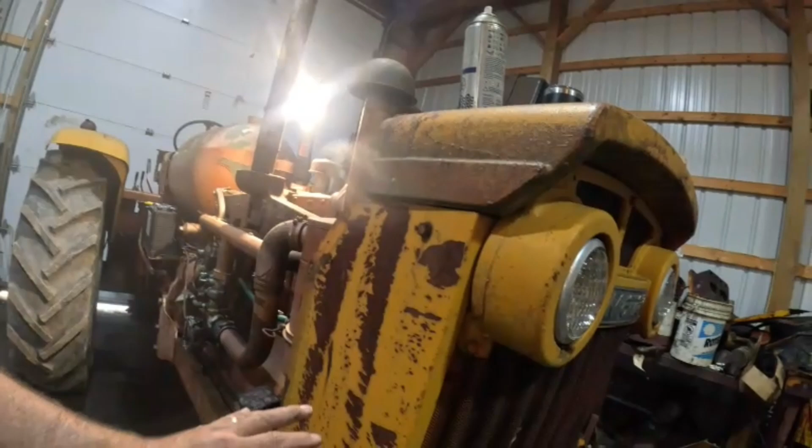This one here, yes, if I keep it long enough and I decide maybe to repaint this one, or at least repaint the sheet metal in this part here. But something must have been rubbing on there or something to make it do that. I don't know. But the hood, where's the hood? Hood's over here, I got too many hoods. But anyways, yeah, that'll clean up nice and repaint nice too.